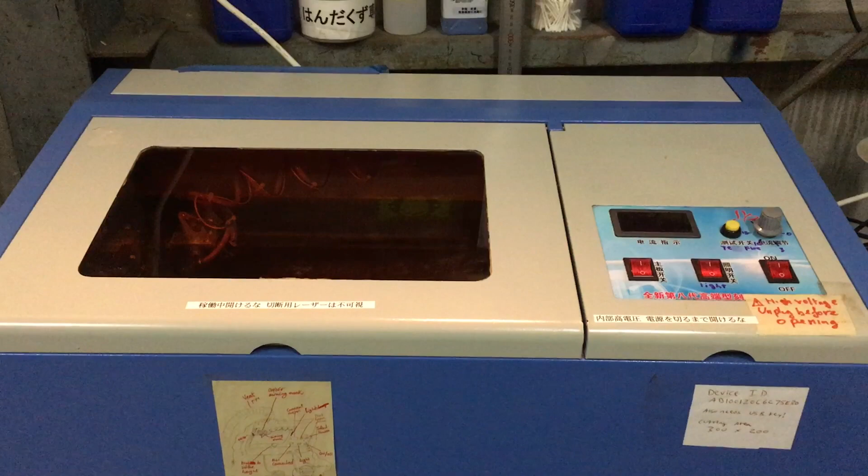So here's the laser cutter. We store the USB cable for the laser cutter inside the laser cutter so it doesn't get lost. If you use the laser cutter, please remember to return it when you're done.

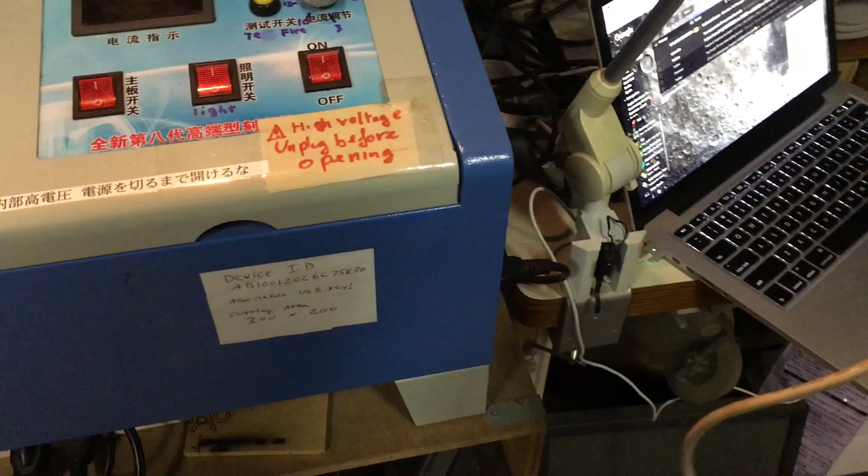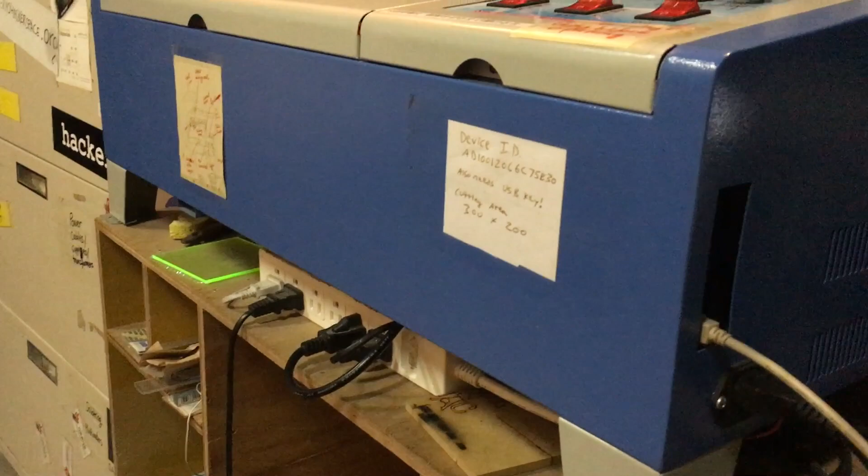The USB cord plugs in on the right-hand side of the laser cutter in the front. You'll find an access port on the side, and the cable plugs in down towards the bottom of the access port when you put it in the correct way. Now that you have that plugged in to the laser cutter, you want to go ahead and plug it in to your computer.

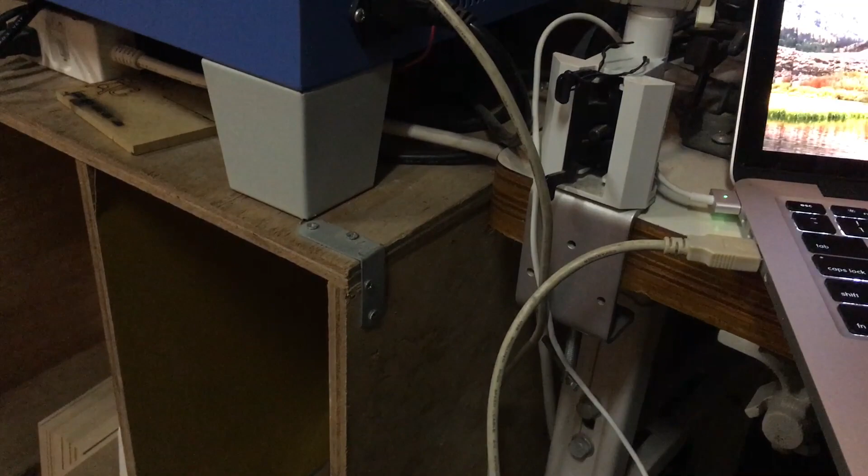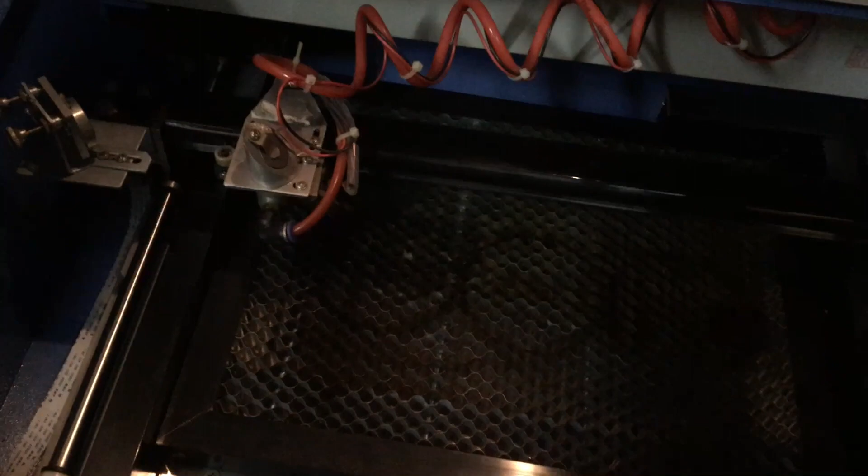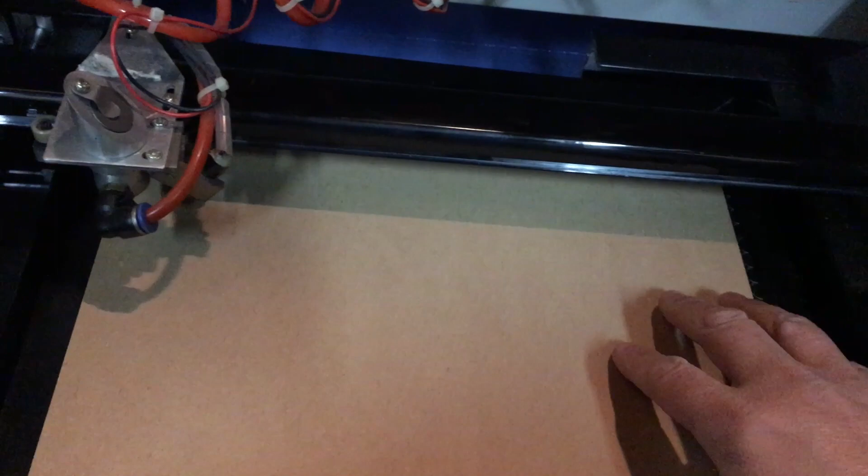With the laser cutter turned off, we will talk about the inside of the cutting area. You'll notice that there's a honeycomb shaped object inside the laser cutter. This is the cutting platform. When you put in your material to cut, you want to make sure that the material is on the honeycomb, never below the honeycomb.

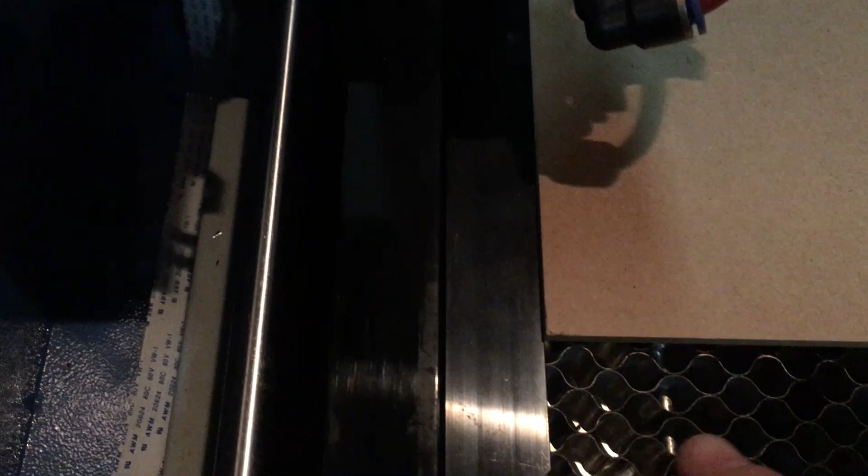And you should always try to get it to sit flat. This material here is not sitting flat, it's kind of concave. So you'll notice that the edge, the material isn't along the edge of the frame, but sits only on the honeycomb. And we do that for the back as well.

You'll notice that in the back here, the frame is here. So we push the material into the upper left-hand corner.

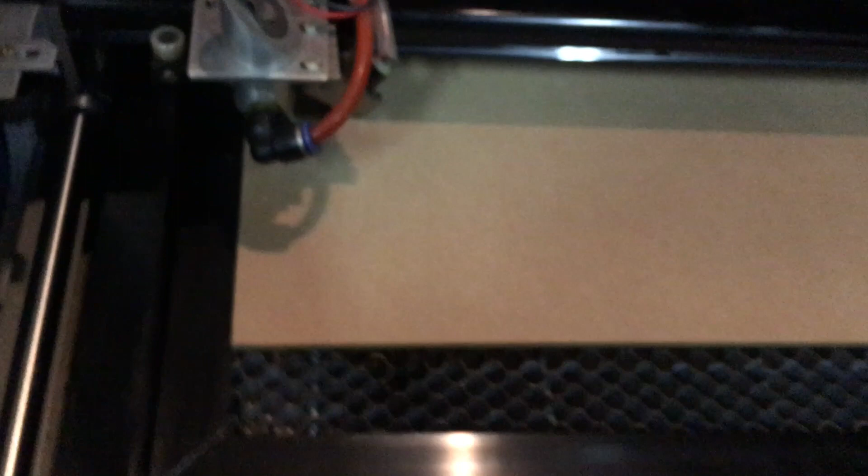We also want to make sure that the honeycomb is pushed up into the left because it is removable. It is not secured down by anything. Sometimes people will move it forward or right, so make sure it's in the upper left-hand corner. That way you will always have precise measurements.

When you are done, you want to close the lid. You should never operate the laser cutter with the lid open.

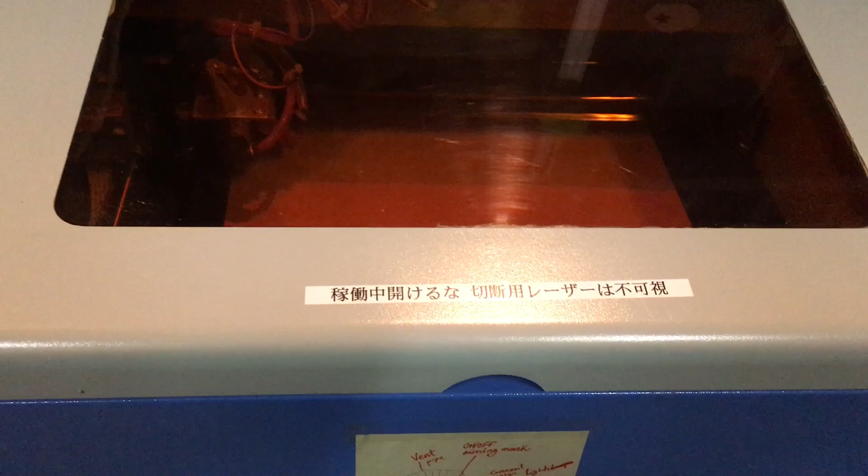When you go to cut something for the first time, you should bring multiple pieces of material. This is so that you can test the laser settings, because depending on the width and type of the material, the settings will change, and you need to figure out what they are for the material you use. There's a list of materials that you can use in the laser cutter on the THS website, and I will link that inside the comments below.

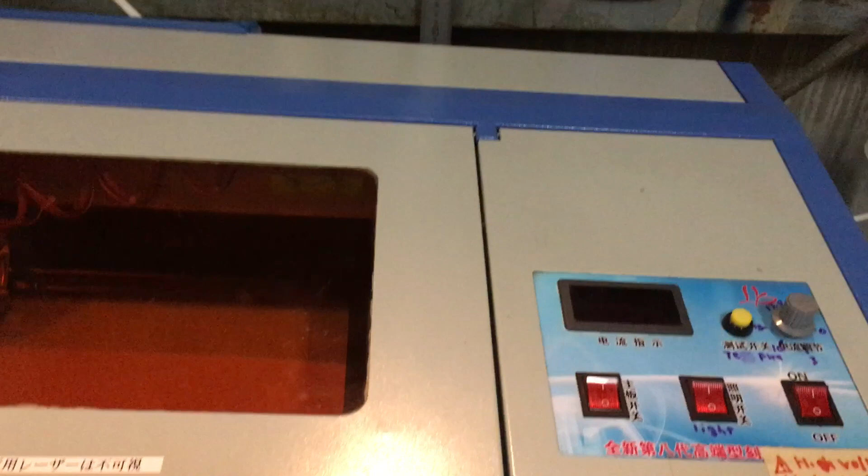So now we have a master switch down here at the bottom. If you turn that on, the pump turns on in the back. It is very loud and very noisy.

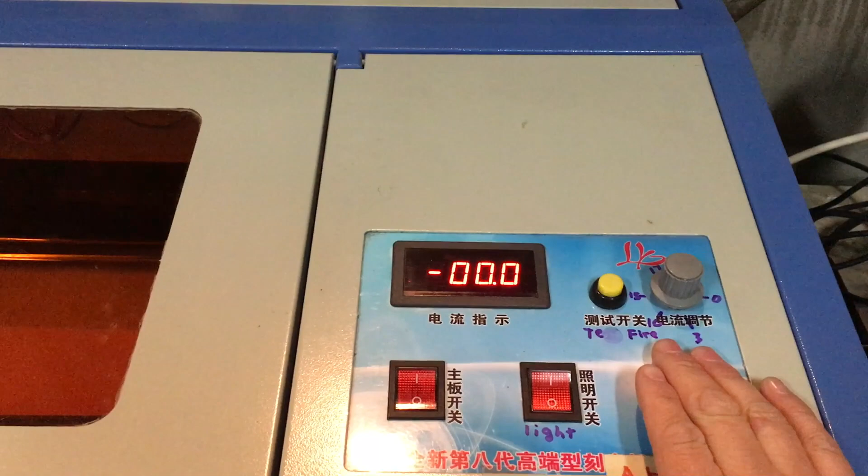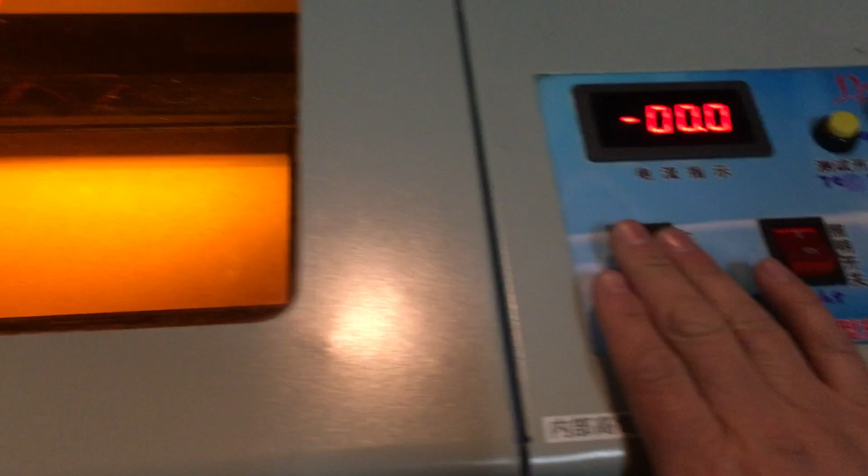Next thing you want to do is turn on the laser cutter. You can turn on the light for the laser cutter so you can actually see inside better. And this is the test laser, it will not cut the material. There's this button here - if you want to see where the laser is positioned, currently that red dot, I'll shut off this light. That red dot is the current position of the laser.

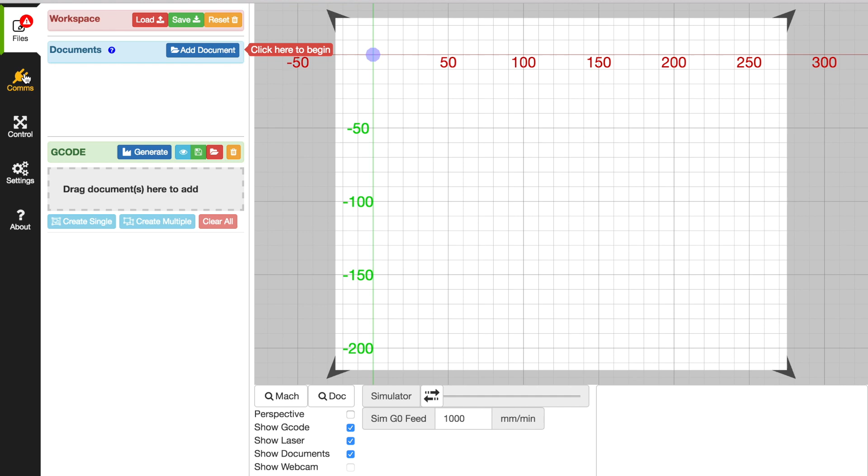Over here at the computer, we'll go ahead and open up LaserWeb. Settings - this is generic smoothie machine. That's fine. You can create a new profile, but it doesn't always remain the way you want it to. LaserWeb's kind of weird, and I'll kind of explain that now.

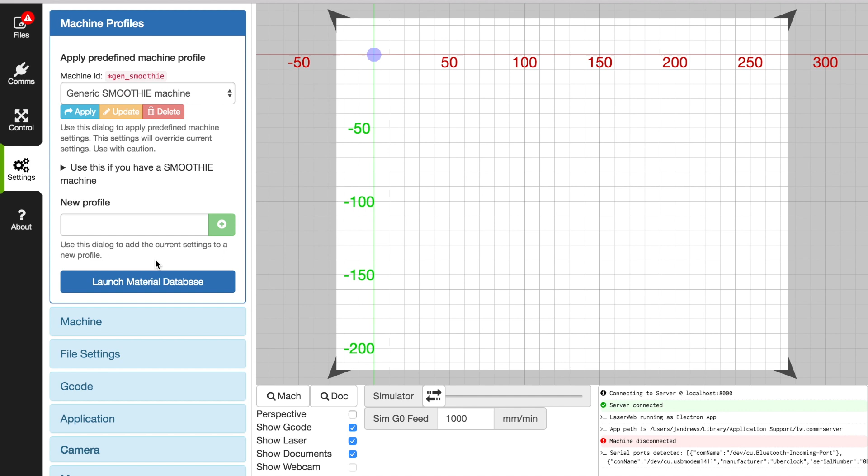So what we want to do is our machine is 300 by 240. We're going to go ahead and set this to 0, and set this to 0 as well. Now, here's where it gets weird. What we're going to do right now is we are going to set the 0, 0 of the laser cutter.

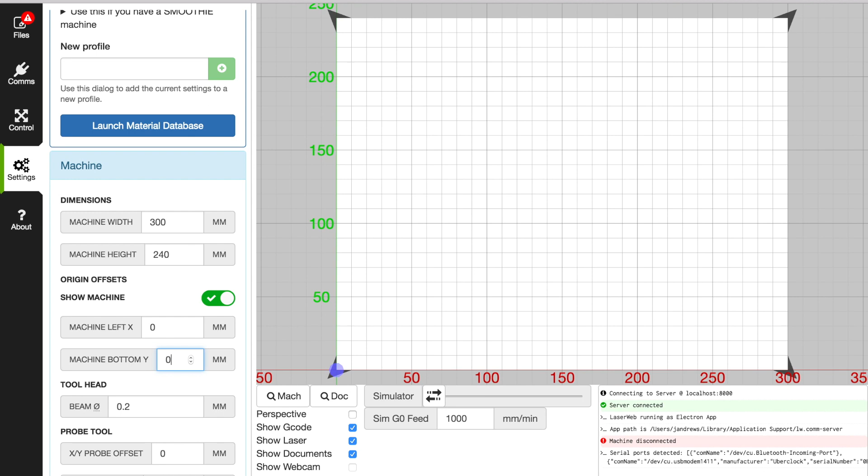So we will go to control, up to comms, and we'll choose the correct COM port. For me it is USB modem at 115200. We will connect, and down here in the corner it will say that it's connected.

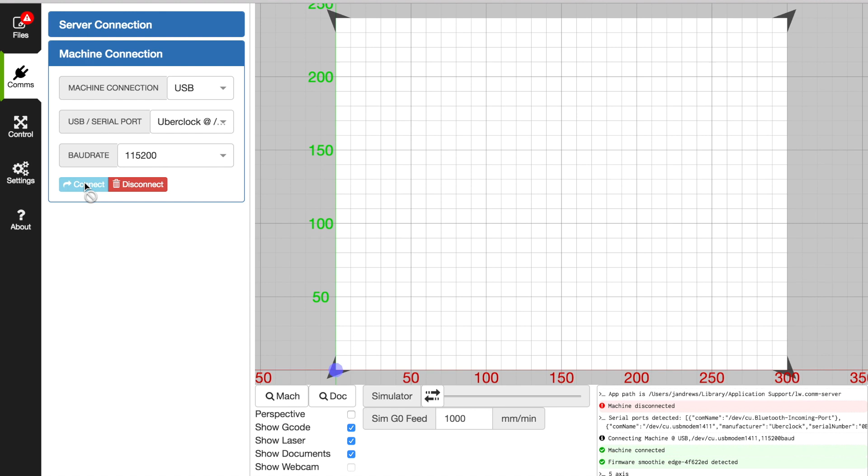So now we go to the controls. Currently we have the laser kind of midway into the left. You want it all the way to the left, and you want it to be at the lower left-hand corner of the material. So what we're going to do here is we're going to go ahead and set jogging to be 100, and we're going to jog it down.

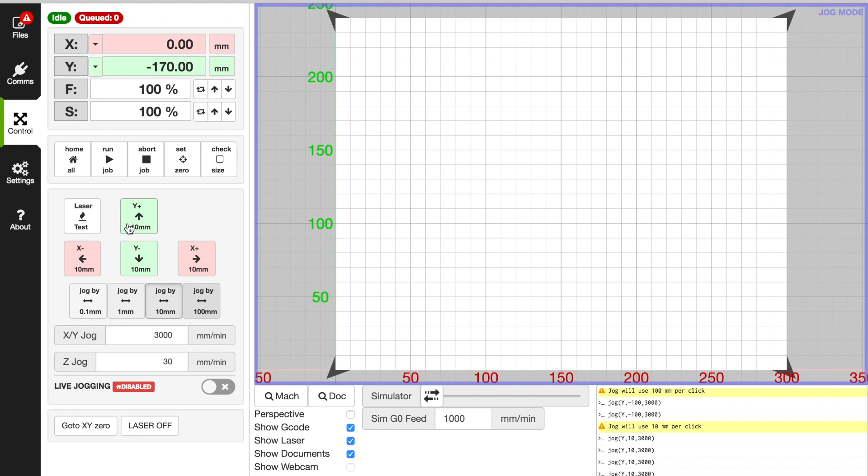And you'll see that it's way beyond where we want. So we're going to go ahead and select 10. We're going to jog it up, jog it up, jog it up. It's just a little bit off, so we're going to change that to a 1, and jog it up until we get it on the material.

Now we're going to do the same thing until it goes all the way left. That is our 0,0 mark. So now we go ahead and we will mark it as 0,0.

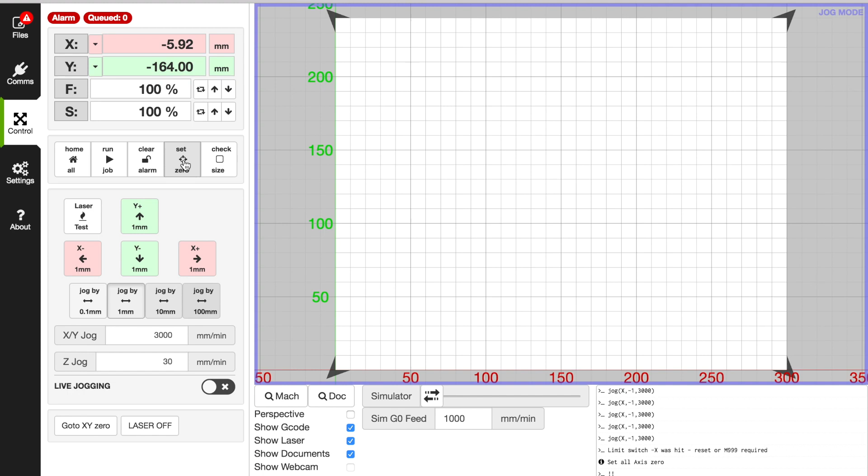Now we can go ahead and set our cut procedure. You'll notice that it's set an alarm in the software, and we don't want an alarm, so we will clear it. The alarm is set because we have hit the X-axis switch, or the X stopper switch.

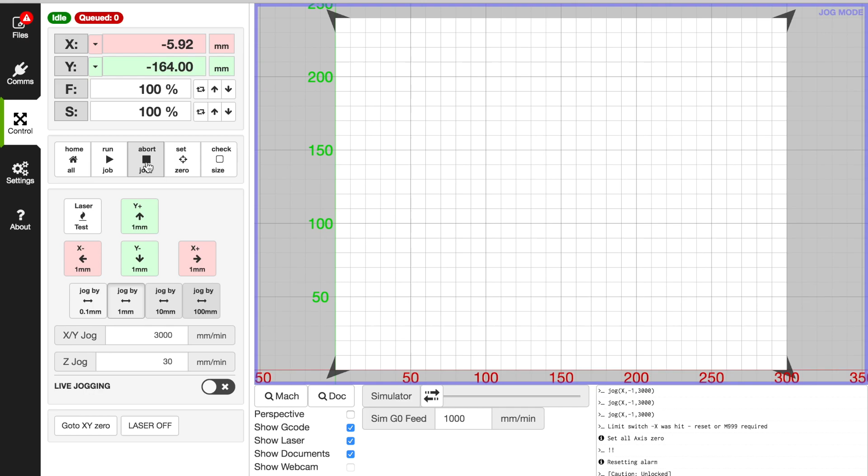So we have our laser at roughly 0,0. We don't want it at absolute 0 all the way to the left, because what will happen is LaserWeb will throw alarms, and when there's an alarm it won't actually cut. So 0,0 is definitely not where you want 0,0 to be.

You set 0,0 to be about 10,10. So you'll basically set it to the corner of your material, and then move it up 10, and move it right 10.

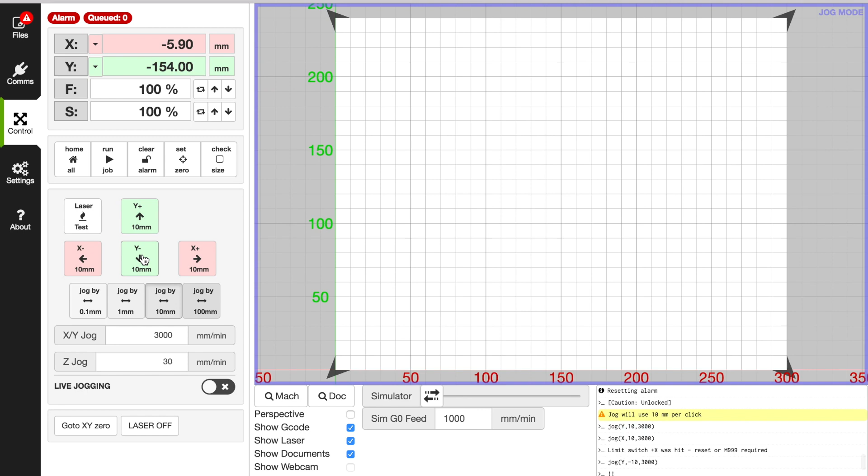And then over inside the configuration or in the control section, you will set it to be 0,0. So that way, when you start cutting, it'll be all set.

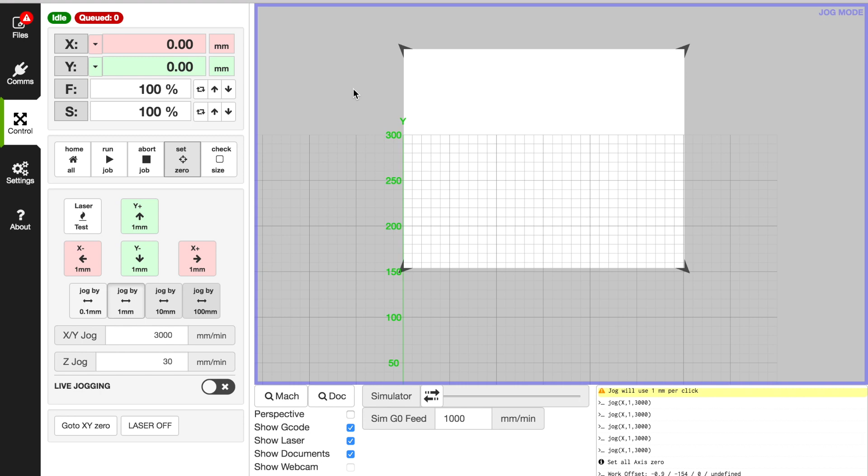Now, this white area is your workspace, and our workspace is 300 by 240. So what we want to do is make sure that your workspace encompasses this, starting at 0 in the lower left corner and going to 300 and up to 240.

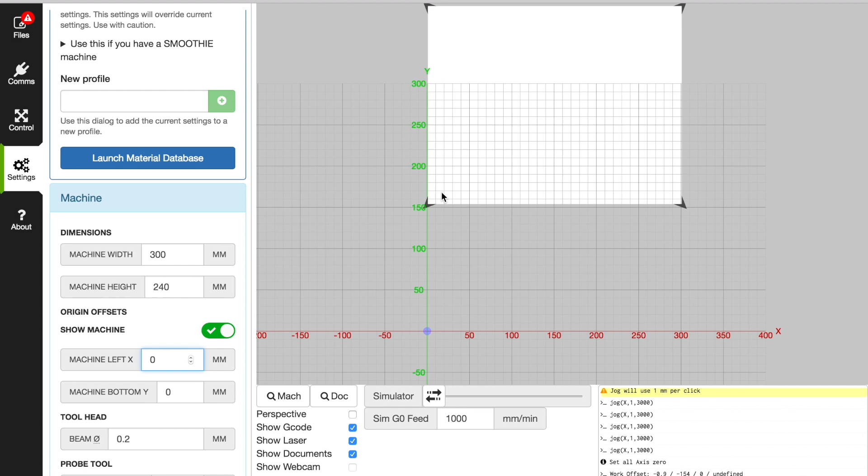Sometimes it'll actually move weirdly, and what you need to do is go to your machine. Like I have here, I've set this to -1, which is the 0 line. See, if I go ahead and set this to 0, it's not perfectly at 0, it's kind of over the edge a little bit. So we'll go ahead and set this to -1.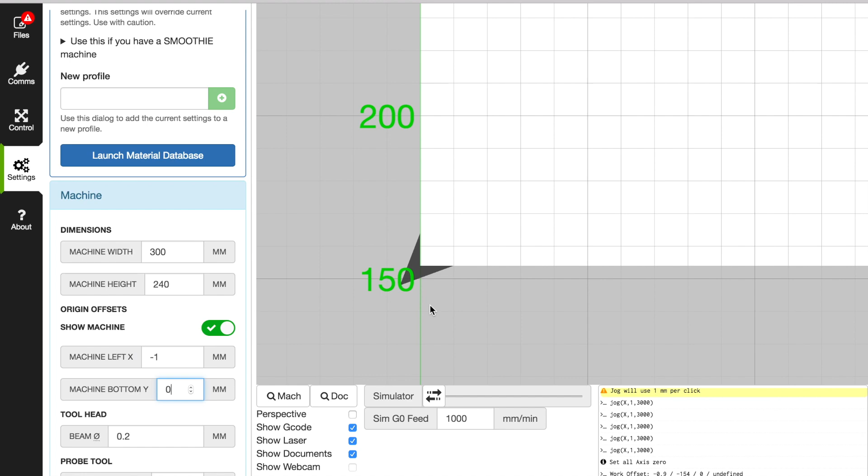Same thing, if I were to set the bottom Y to 0, it's not — it shows it being 150. So we want this here at -154. You may have to experiment. Actually, it looks like I want it at -155. Correct, that's right. So you need to experiment to make sure that it works where you need it to work.

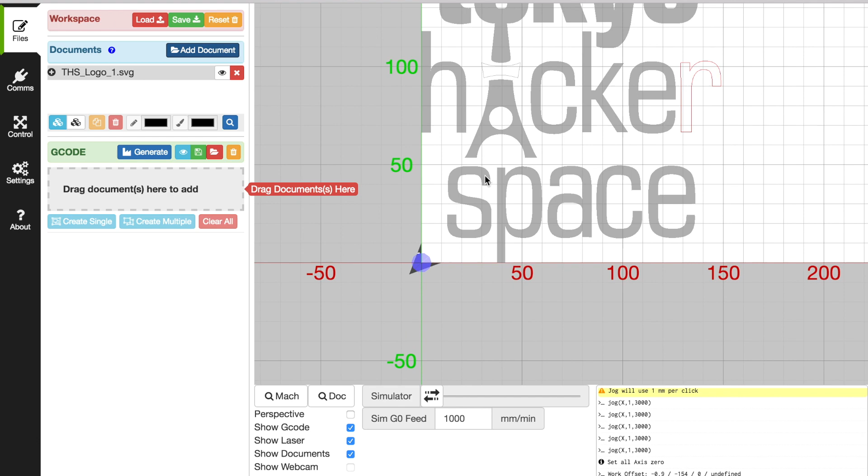Once you have that set, basically you go up to Files, you'll add a document. I'm going to use this THS logo. And then from the THS logo, we're going to go ahead and...

What are we going to do here? We're going to go ahead and drag it, because you can't do anything right now. Drag it from there down to here, and that makes it an actual object. You'll notice we're going to do a laser cut, and we want to set the stroke to be black.

We want the cut rate to be actually kind of high, like you want it to be 600 millimeters per minute. You want to experiment with this because I've not perfected it.

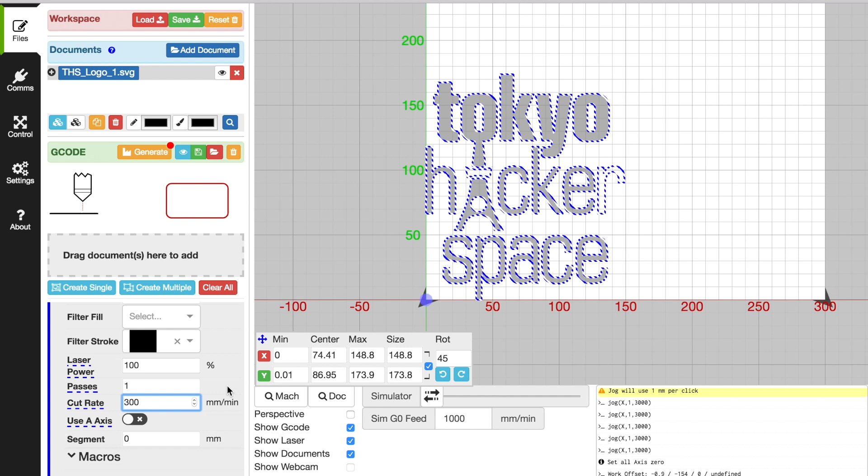Now there are two ways to set the laser power. In LaserWeb, we've got this 100%, and on the laser cutter, we have this knob, which is currently at 100%.

Modifying the laser power from here, I've tried 20% and it tends to burn my material a lot, so I'm going to go ahead and set it to 10%.

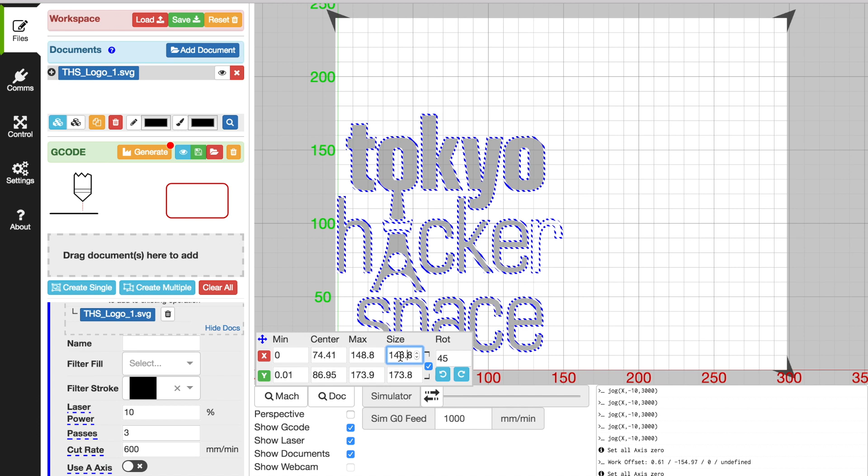So 10% is cool, and we're going to go ahead and go over here. We don't actually want it to be quite so big. We're going to set this to 75 or 83.

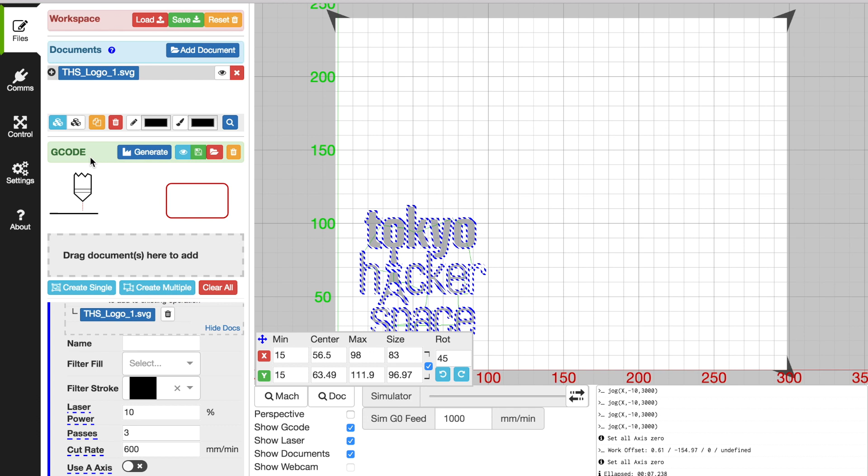And once you've done that, we're going to go ahead and generate our G code, because all of this is required in the G code. So we generate it, and go to controls, and we are going to go ahead...